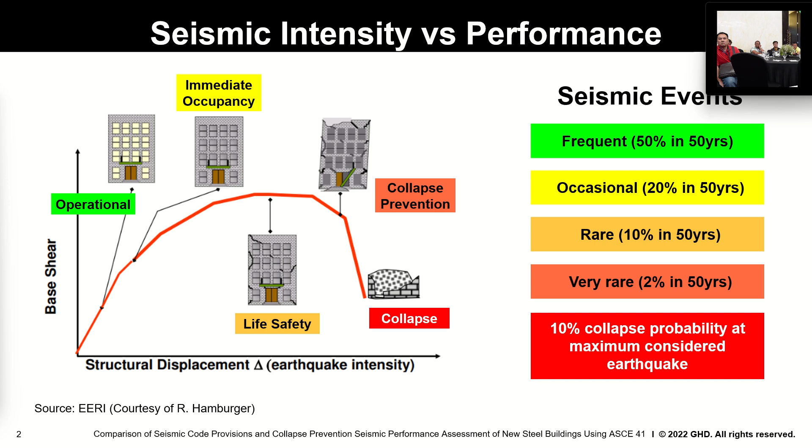However, one of the misconceptions about the code is that if you design a new building according to the latest provisions of the code, it's essentially earthquake-proof. Yan yung parating sinasabi ng mga developers and our clients. But that is not true. Because, in fact, in the 2010 version of ASCE 7, the American standard that we are gonna follow in the upcoming code edition of NSCP, it explicitly specifies an acceptance of 10% collapse probability under a maximum considered earthquake. So that's our motivation in doing this study.

Now, the design of steel buildings is regulated by a series of standards starting with NSCP or ASCE, which sets the basic design criteria and associated lateral drift. And with the publication of SAM-PH, as mentioned by Kuya Cesar, by PHIVOLCS in 2021, ASEP will be revising the seismic provisions of NSCP from UBC 97 to ASCE 7-05, but with some modifications because 7-05 is quite an old version of ASCE. So we adopted some modifications in the latest ASCE standards.

And here, we're going to present the design and evaluation of 3 archetype steel buildings. We have the 4, 8, and 12-story building with architectural layout based on a typical residential building designed to resist 4 seismic hazard levels from NSCP, SAM-PH, and site-specific MCE and MCER.

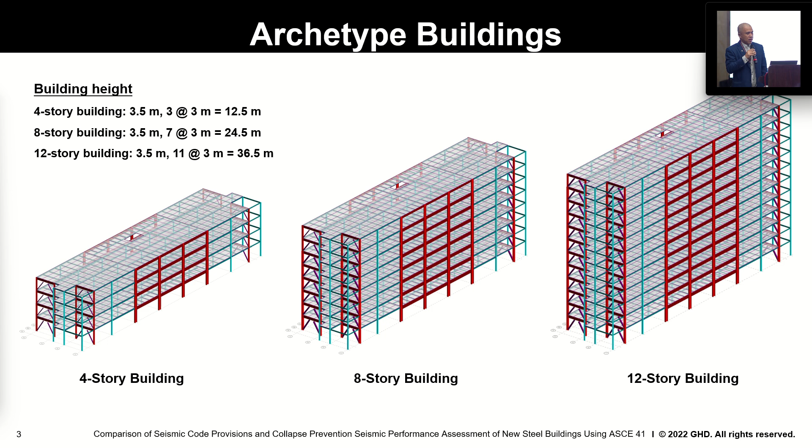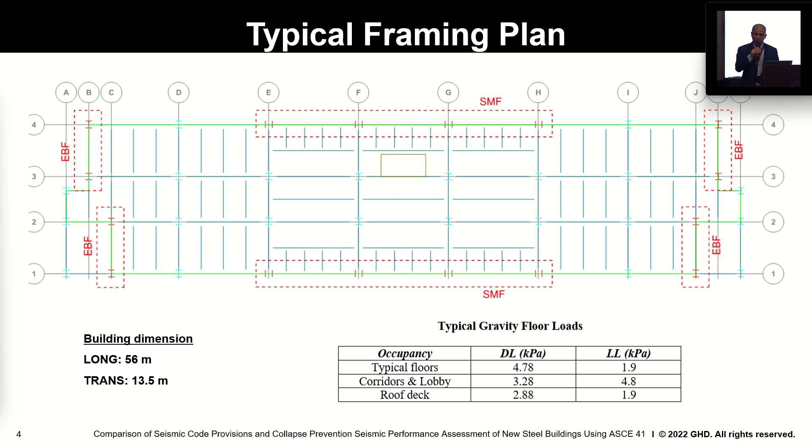The typical building plan is rectangular with overall plan dimension of 56 by 13.5 meters, and the gravity system is composed of a composite metal deck supported by wide flange I-beams and columns. And as you can see on the screen, the seismic force resisting system is composed of a eccentrically braced frame along the Y or transverse direction, and we have the special moment frames along the longitudinal direction or the X direction. But for the interest of time, we will only cover the SMFs in this presentation.

The seismic hazards are developed from an undisclosed location in Metro Manila, which is approximately 10 kilometers away from the West Valley Fault in Marikina. It can be observed, if you look at the response spectra on the screen, that the ground motion using PSHA is significantly lower than the current NSCP values.

Now, this unique case in Metro Manila is somewhat similar to coastal California, but it's the other way around, because in California the probabilistic was way higher than the deterministic. That's why they capped the probabilistic. But in our case in Metro Manila, the probabilistic PSHA is way lower than the deterministic current NSCP.

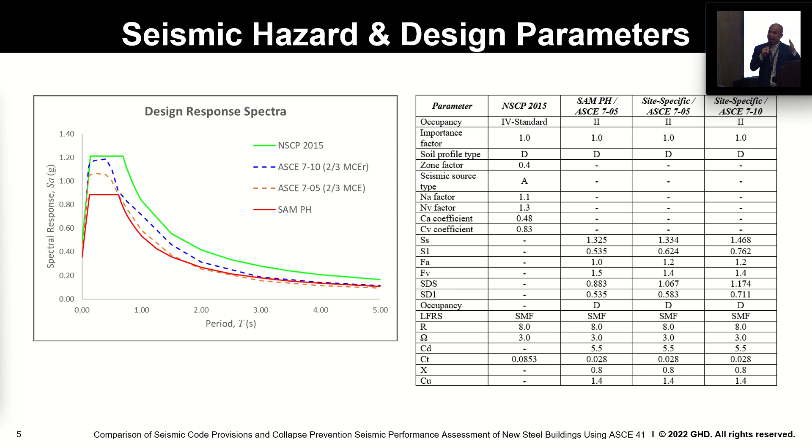Now, this significant difference could be alarming because millions of people living in Metro Manila will be affected if a major earthquake happens that is similar to the great East Japan Tohoku earthquake, if you're familiar with that one. That was 10 times stronger than anticipated by the scientists. And it may happen in our country.

Now, during large seismic events, SMFs are expected to develop significant inelastic deformation, mostly, if you follow the code, in the beam plastic hinge location. So it should develop hinging on the beam and not on the column, except for the base. Now, the SMFs in our study are proportioned using the equivalent lateral force procedure, just to simplify. And for consistency of material design specs, we just followed the 2010 edition of AISC 360 and 341.

Now, for our design, since this is SMF, as we all know, it's controlled by the drift requirement, although we use the period from the dynamic analysis and we also follow the exemption on the minimum base shear, but still drift governed. And in the design, the stability analysis, like the large P-delta effects, is evaluated using the AISC 360 direct analysis method. We ignored the rigid zones, and we consider reduced stiffness.

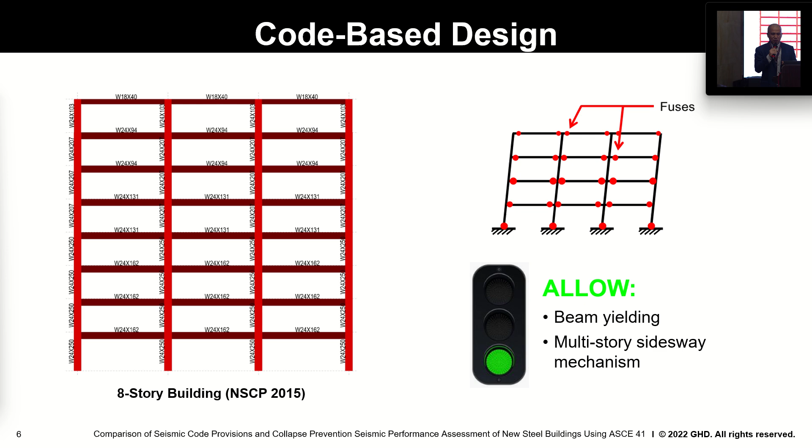It's mainly to justify the use of K factor equal to 1 for all the steel members instead of calculating all the K values. And then to account for small P-delta effects, the amplified first order analysis is performed by using the B1 factors. So it's mainly to simplify the analysis and the design. And also we considered notional loads to account for geometric imperfections of the steel buildings, like out of plumbness.

Now, as expected, the resulting design base shear using PSHA is significantly lower than the current NSCP 2015. That's roughly 30 to 40% lower for all the building heights we considered here. Looking at it commercially, for developers and our clients, there could be big savings in constructing new buildings if you follow the upcoming PSHA as it is. But on the other hand, there could be potential issues of damage or even collapse whenever a seismic intensity larger than the anticipated level occurs in Metro Manila.

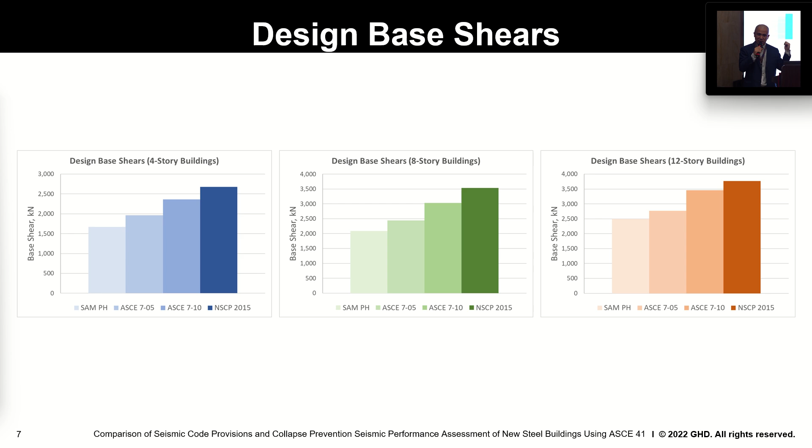Now, since the intent of the code is to prevent partial and total collapse during a very rare earthquake, the seismic performance of the SMFs we designed here is evaluated using ASCE 41. The nonlinear force deformation models of the SMF are constructed in accordance with the generalized force deformation curve of ASCE 41. The column bases are modeled as fixed, and 3 types of nonlinear hinges are built into the model. We have the beam moment hinges near the face of the column, the moment axial interaction hinges at the column ends, and the panel zone hinges.

Now, modeling of the moment connection stiffness is required by ASCE 41, but since we use pre-qualified SMF connections, we just assume that the formation of the plastic hinges will occur within the beam and not on the connection face on the column flange.

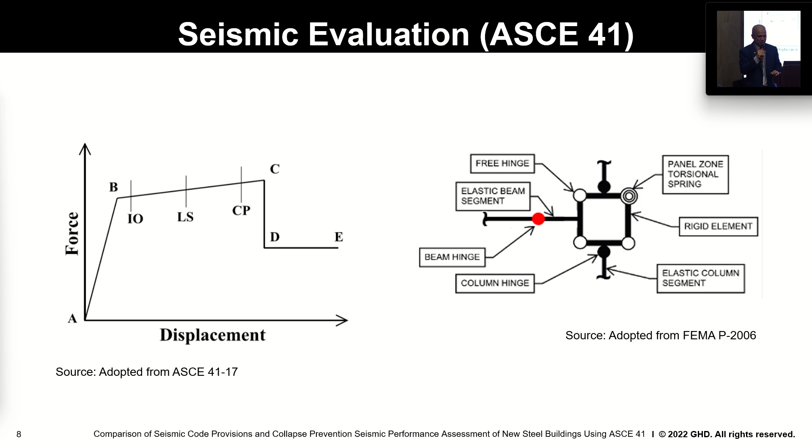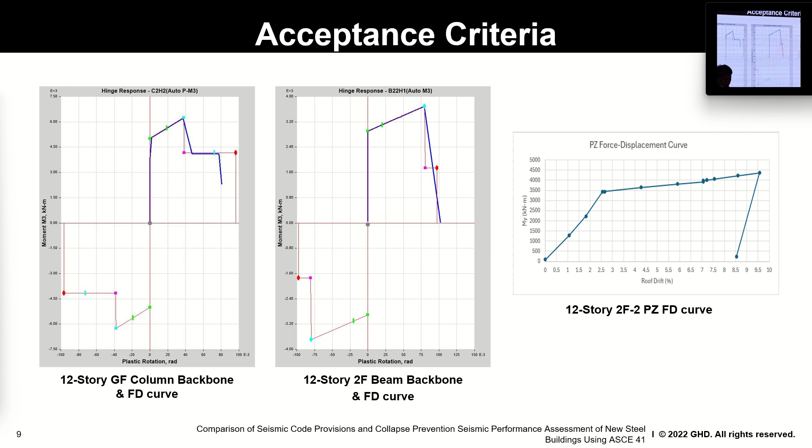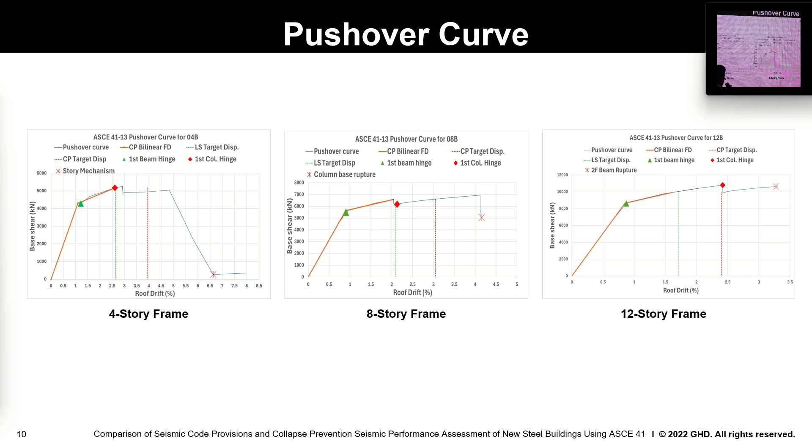For the 12-story, column hinges emerge within the target displacement range, as you can see in the 3rd graph. So with the noted observations, the prescriptive intent of the code for beam mechanism is given focus. No column hinges should develop for the structure to behave ideally as per the code. But as observed and realistically, this is very difficult to achieve.

For this slide, the structures are pushed further beyond their respective collapse prevention target displacement to get an idea of their behavior leading to component rupture or collapse. We have tagged the demand capacity ratio of each component for each structure. For the 4-story, a story mechanism exhibited at the ground floor to 2nd floor columns. Hinge rupture at both ends of the column developed, causing the structure's loss of strength and stiffness.

As you can see in the previous slide, the pushover curve of the 4-story has a steady drop, as you can see in the red dot in the picture, hence noted by the drastic drop in strength and stiffness in the pushover curve. The 12-story structure is unique because, compared to the two previous structures, it showed the most ideal behavior for collapse. The beam rupture at the second floor caused the analysis to stop before the column base hinge reached its rupture point, unlike the two other structures.

For this study, it has been noted that the pushover curve is sensitive to the beam hinge distance, SH. For future studies, it is recommended to evaluate the sensitivity of the beam hinge locations and include the beam column connection nonlinear properties. It is also recommended to try a different approach in modeling the column base hinge, such as pin base with foundation flexibility and modeling of the base plate hinge backbone curve.

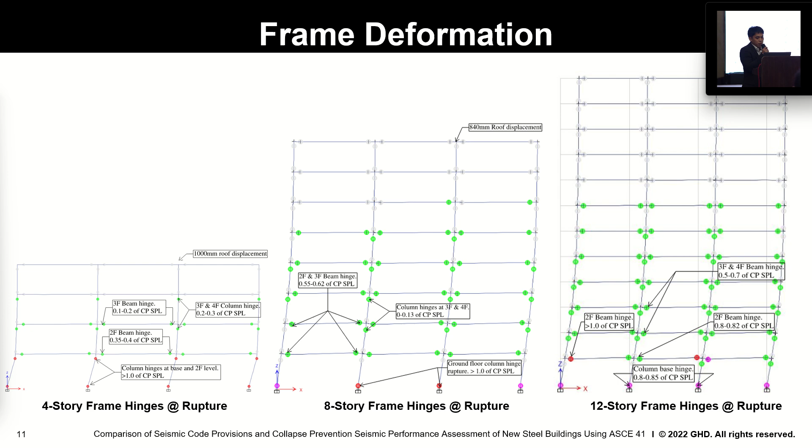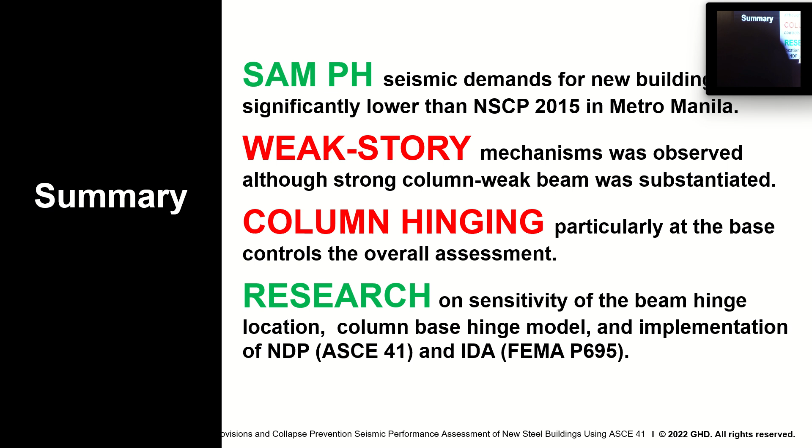Number three, the hinging of the column base controls the overall assessment, which is more detrimental to the overall performance of the structures. And lastly, we recommend further research to evaluate the sensitivity of the beam hinge location, the column hinge modeling that we implemented, and implementing the nonlinear dynamic procedure according to ASCE 41, and probably incremental dynamic analysis of FEMA P-695.